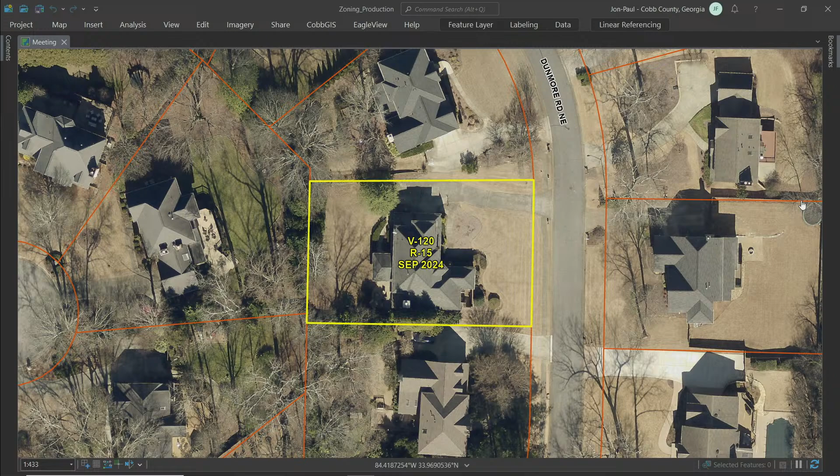I know there was some concern from the Stormwater Department about what happens when that fills up. But the homeowners have lived in the house and the neighborhood for a very long time, and would like to continue to live there and have the outdoor space. I know it was suggested that we do something on the downhill neighbor's side to help prevent any flooding of their basement, but we're not comfortable with the liability of taking on that project, especially given the history of flooding in their basement.

Do you have anything else? No, that was it. Okay, you may be seated.

Hi, one of the things too that I guess we were— introduce yourself, do you need my name? Chandra Brown. Sorry, it was about the storm drainage size. We're going above and beyond in the sense that the extra percentage we're asking for, we're increasing the size of the storm drainage to incorporate the whole backyard, not just the overage. So we feel we're going above and beyond to help with any potential issues. Okay, thank you.

Mr. Heath, if I could have you come forward, please. Andrew Heath, Cobb County Stormwater Management.

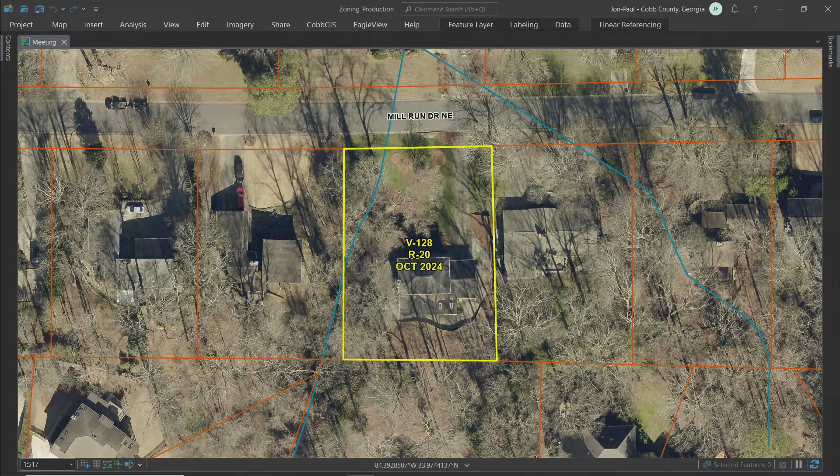And your client's not willing to budge? No, it's between $3,000 and $10,000 from what we've found out so far. If it was $200 or $300, $500, he'd be willing to, but that's a little out of his budget for the project. Okay, do you have anything else to add? No, ma'am.

Okay, you may take a seat. All right, Mr. Heath? Hello, Cobb. Andrew Heath, Cobb Stormwater Management. You heard the applicant has basically refused to do the analysis, so I don't know where that puts us. Yeah, I believe the variance request was for a rear building setback, if I recall.

So ironically, I don't really have any objection necessarily to a setback variance, but as a general rule — and it's seemingly unfair that one individual has to evaluate that issue — a long time ago, in the 70s, 80s and prior, there wasn't as much attention paid to stormwater management issues, and unfortunately there are a lot of built-in, difficult to resolve issues. I had spoken to the applicant by email a few times, and the applicant made the point that if the deck was going to be in the dam breach zone, potentially maybe the house is as well, and that may well be the case.

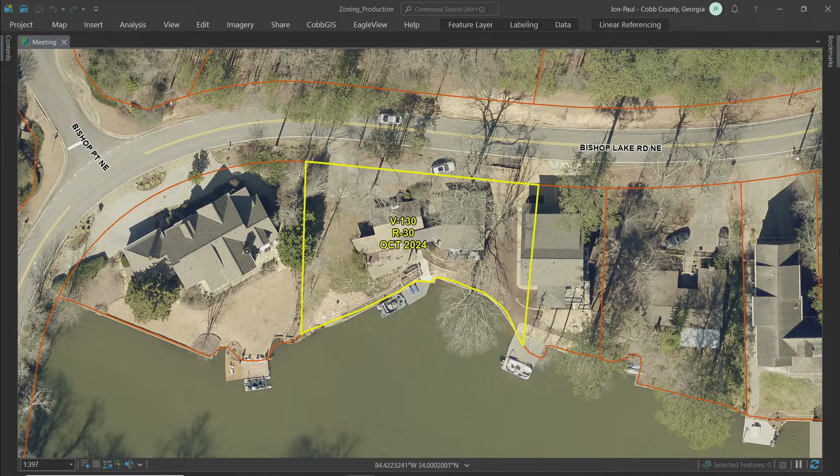Madam Chair and Board, I'm Robert Kane. My associate is Thomas Bogan, and we are representing the owners in the design of a new home for 4540 Bishop Lake. The owner's property is a legally platted residential lot of record. The owners have a vested right to build a residence on this property, and that right has been impinged upon by subsequent adoption of R30 zoning. The application of R30 zoning, designed for lots minimally 3 times the size of our client's lot, has on this property rendered 95% of the property unbuildable.

By definition, a zoning hardship is a unique condition of a property that makes it difficult or impossible to comply with zoning regulations. Given the jurisdictional hardship imposed by the application of R30 zoning on a legally platted residential lot, the owners request the following variances, which are sufficient to allow them to construct a home typical of others around the lake. The variances we are requesting are a 19-foot front yard setback...

Excuse me, do you have handouts for us that has all this listed? Sorry, what? Do you have handouts for us that has your variances listed so that we can have them? We have a slide presentation that will help. We really need it here on our desks to see it. Well, we'll show you what we have.

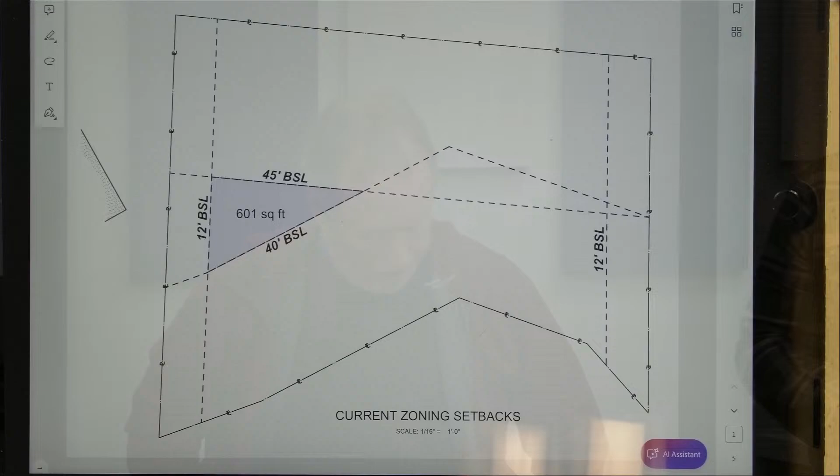We're requesting a front yard setback of 19 feet, aligning with the street side of the existing house. We're requesting a rear yard setback aligning with the lake side of the existing house. We're deleting our request for a side yard setback and for the driveway request. For similar reasons, many variances of this nature have been granted by Cobb County on numerous properties around Bishop Lake. Properties on either side of this property and directly across the slough are prime examples. My associate, Thomas, will now present documentation of the effect of the zoning hardships on this property, also adjacent and nearby Bishop Lake properties with similar conditions that have received variances. And finally, we will present our solutions for a new house on the property if the variances are granted.

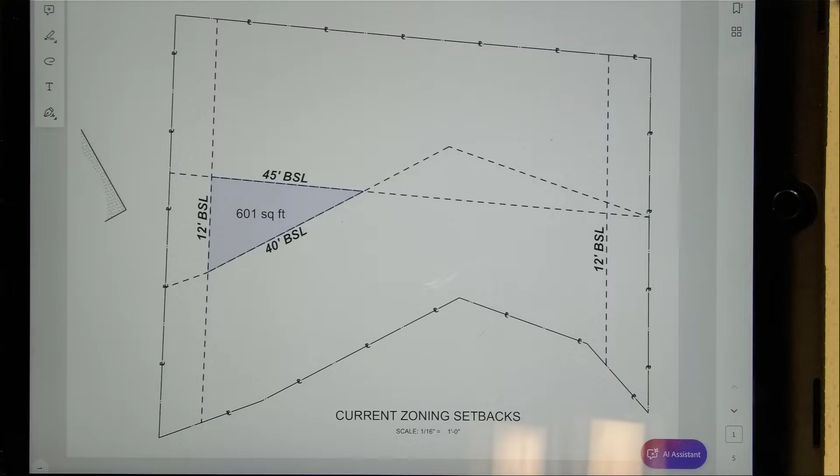Once again, I'm Thomas Bogan. I know the site plan that you have on record still from last time we were here was, I guess, somewhat confusing. So we decided to present some diagrams where we split out that information to make it clearer. This first slide shows the property with the current zoning, the setbacks - front, side, and rear - and the resulting 601 square feet that's currently buildable if this was just a new lot with nothing on it. This shows that same buildable area with what's existing currently shown. This shows what that equates to in program: a very small single-floor house and an adjacent small studio.

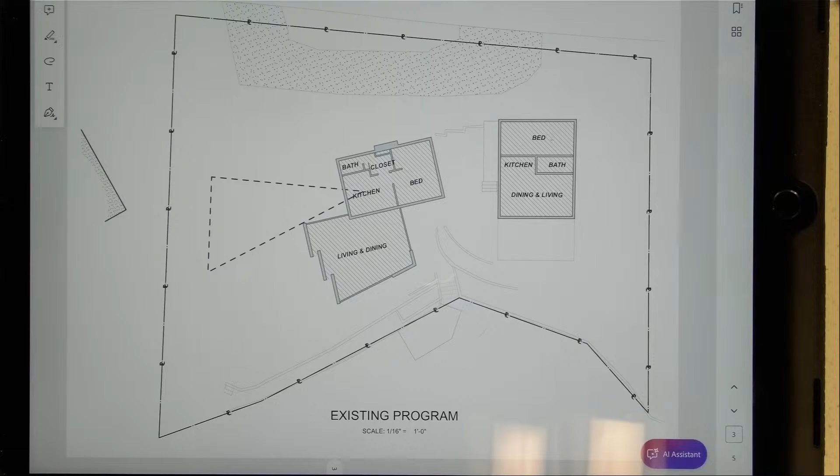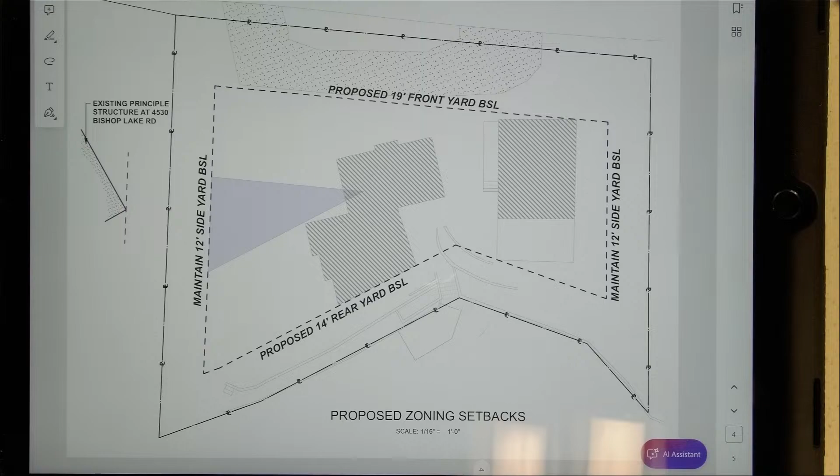These are our proposed front and rear setback reductions based on the existing structures. We're maintaining the side yards with no request there, and we are not requesting any increase to the allowable impervious surface. This shows overlaid a rough idea of the eventual massing of the house with a garage, just a slightly larger footprint than what's there currently, to basically meet contemporary standards of what would be expected in a house of comparable size in the area. The existing total building footprint is 1,683 square feet. The resultant total footprint would be 2,918. Anything dealing with impervious surface would be dealt with during permitting - we aren't asking for any increase allowable. Anything dealing with stormwater, we intend to abide by all codes, all regulations, all ordinances.

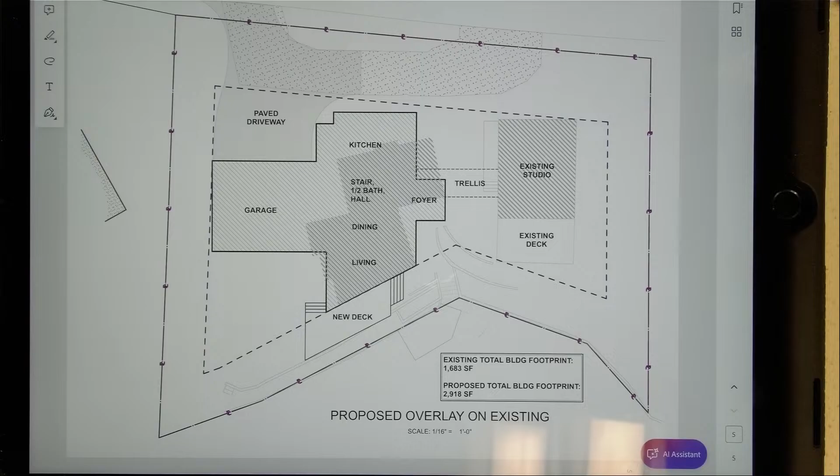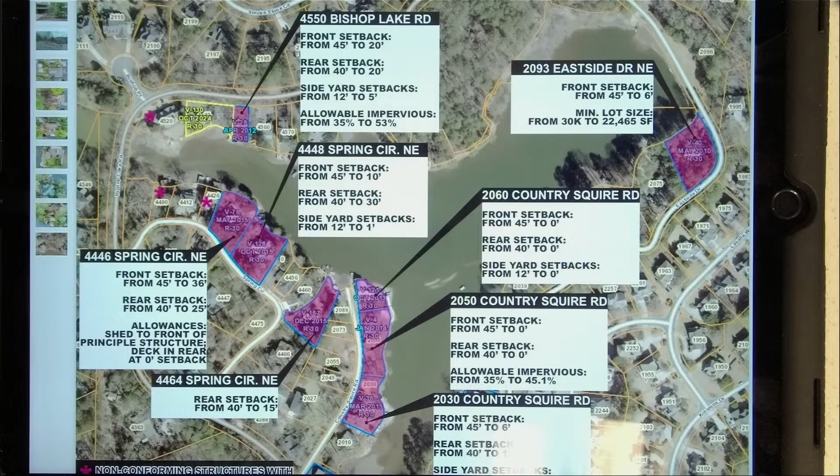This is the map that's currently available online, showing variances in the immediate area that have been approved. Many of these reduce the front yard and rear yard setback to 0 on lots that are less constrained than 4540 Bishop Lake. Many have been reduced to 20, or 15, or 6.

There are also properties marked with an asterisk for which there are no variances recorded, but the structures on that lot are clearly non-conforming and would have required a variance to make what's built there even legal.

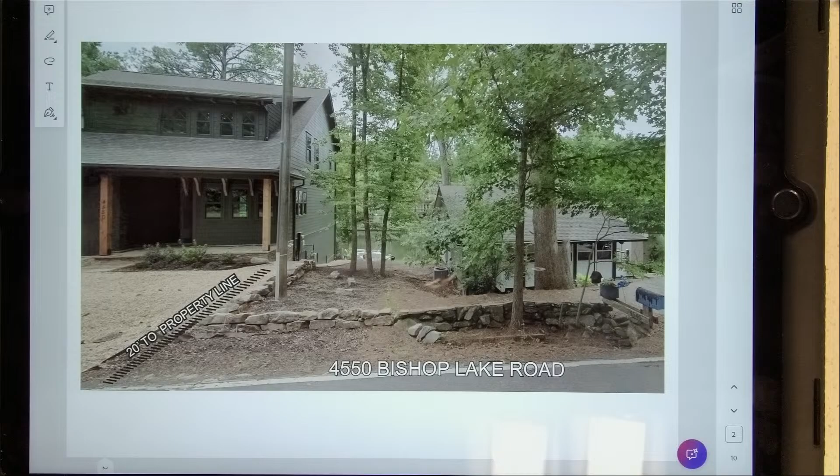We have some aerial photographs. This is the property 4550 Bishop Lake, just to the east, which was granted a 20-foot front yard reduction.

And we could go on. There are numerous properties around this lake where the houses are built right up to the lake, where hardscape is right up against the lake, and there were, I guess, no concerns raised about the non-existent lake buffer, stormwater, or erosion control when these were built.

We're just asking to reduce the front yard and rear yard setback to allow for a house of comparable size to those around it to be built here. There's a clear precedent set all over this lake where people have been granted much more extreme setback reductions. Thank you.

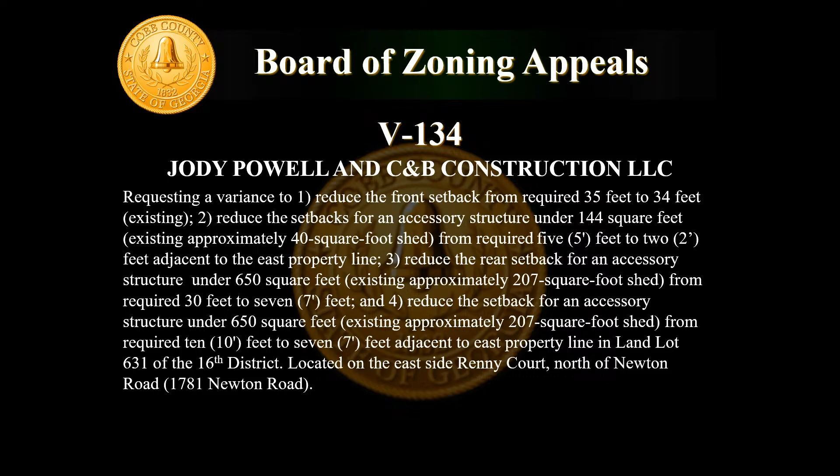Number three, reduce the rear setback for an accessory structure under 650 square feet for an existing approximately 207 square foot shed from required 30 feet to 7 feet. And four, reduce the setback for an accessory structure under 650 square feet for the same existing approximately 207 square foot shed from required 10 feet to 7 feet adjacent to the east property line, in land lot 631 of the 16th district. The property is located on the east side of Renny Court, north of Newton Road.

Is the applicant present? The director shows the applicant is here. Is there anyone here opposed to variance case V-134? The director shows no one opposed. Would the applicant please come forward to be sworn in?

Hi there, my name is Jody Powell. So to begin with, I'm very unprepared for this, I guess. November 25th of 2023, our house burnt down, and we are just trying to get a variance because after doing boundaries in the site plan, we found that the southwest corner of our house is right on the current setback.

We're also asking for a variance to provide a wheelchair ramp for my wife, which will go past the front setbacks currently in place. I also have a shed where I keep my lawnmower and tools, and a small wood shed on the east side of the property. Instead of tearing all these things down, we're building back on the same foundation. So this is the reason why we're asking for the variance.

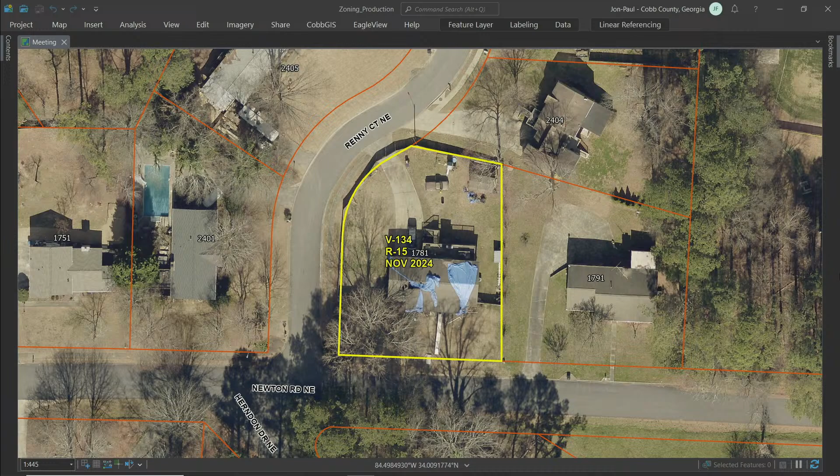Okay, so any questions from the board? Okay. My motion would... oh, you may sit down. Oh, thank you, thank you.

My motion would be to approve the variance, incorporating the fire department's requirement for 1-hour fire resistance construction because the setback is less than 5 feet, and also to move the sheds as needed outside the drainage easement. I think that takes care of everything. Any questions or comments? Do we have a second? Second. Place your votes. The variance is carried 5-0.

It's approved. Next, Mr. Peterson.

Okay, next case is variance case V138, West Buchanan. Request a variance to, number 1, allow an accessory structure over 1,000 square feet for a proposed 1,800 square foot sports court to be located closer to the side street than the principal building. And number 2, reduce the setbacks for an accessory structure over 1,000 square feet for the proposed 1,800 square foot sports court, required 100 feet to 7 feet adjacent to the north property line, 14 feet adjacent to the west property line, and 91 feet adjacent to the south property line in land lot 255 of the 20th District. The property is located on the west side of Cherry Bark Trace, south of Walker Hill Way.

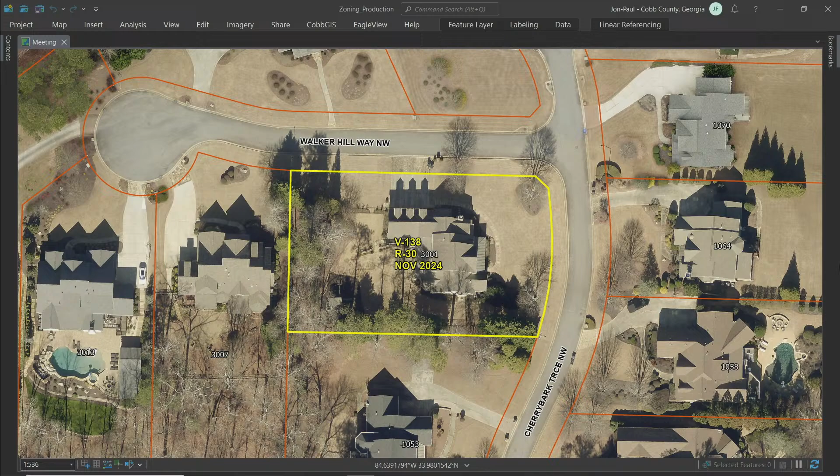We are going to be over 5,000 square feet of new impervious surface. Our approved plans for the pool already show a stormwater management system that would hopefully be acceptable to Mr. Heath over here. We went ahead and sized it in anticipation that the board would hopefully agree for the sports court, so that impervious area would be included as well. So that's really it.

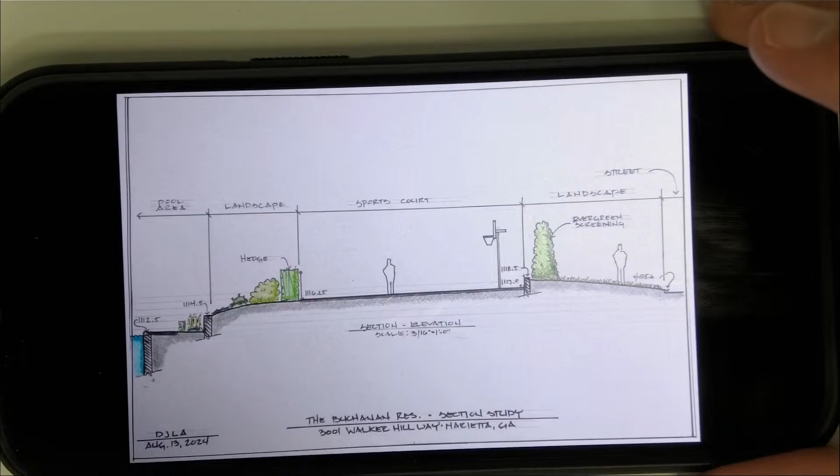So if you're looking at this plan, to the right would be Walker Hill Way, and then there would be, I think we were talking like 8 foot high evergreens in front of the wall, but you can see where the wall would be, a cut wall in that scenario, and then the basketball goal.

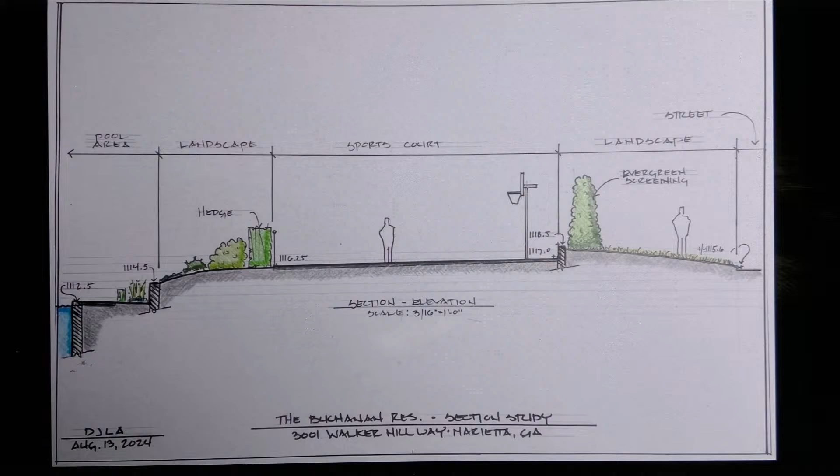You have curb there on the road, on this area? Okay, so how far is the curb from where these evergreens are proposed to start? With the 7 foot, we would be putting it right up close to the right of way, so it's a 50 foot right of way. There'd probably be your driveway apron, probably another... yeah. So it'd probably be from the back of the wall to the curb, like we say, 17, 18 feet.

Why was this wall designed to be curved rather than a straight wall at that point? It's pretty much for aesthetics.

You say you've already built the sport court or in the process of doing so? Not the sports court at all, no. That would be something that we would need the variance for. So we've started construction in the backyard for the pool and that leveled out area in the back.

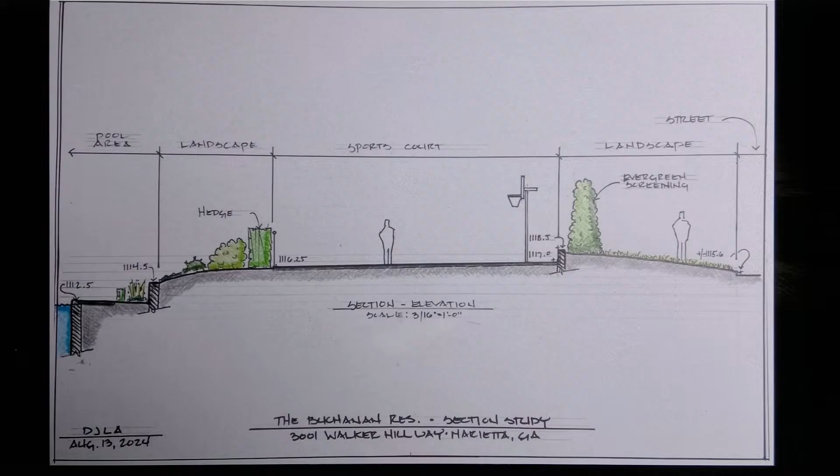Do you plan to use any lighting on the sport court? Just low voltage lighting, landscape lighting, and there's a security light on the back gable of the home. So there would be no commercial stadium type lighting or anything of that sort. Any overhead lighting above the rim? Any elevated lighting above the height of the rim? Oh, no, not at all.

Could you also give us your name, please? Wes Buchanan.

So I'll throw this out to my fellow board members. My leaning at this point, and I want to solicit your comments, is to require that they go back and come up with something that's at least 10 feet outside the right of way as to all matters being constructed, and that the evergreen screening stay at least 5 feet from the right of way. That would be the direction I would try to provide to this applicant and his design professional. And then I would probably put some restrictions on the lighting, but I throw that open for comment before making a motion.

The neighbors that are mostly affected behind this, have you reached out to them? Do they know what you're building? Did they sign? Did they approve this? Yeah, they're very aware. You have a signature from them? I have it, yeah. And you have a signature from the neighbors to the side of it as well? Yes, both neighbors. And they know that you're having a sports court? Yes. I had to get it all approved through the HOA. Oh, you did? Okay, yes. And their signatures are part of our application, it should be in our packet. Yeah, I didn't get that part, but thank you so much.

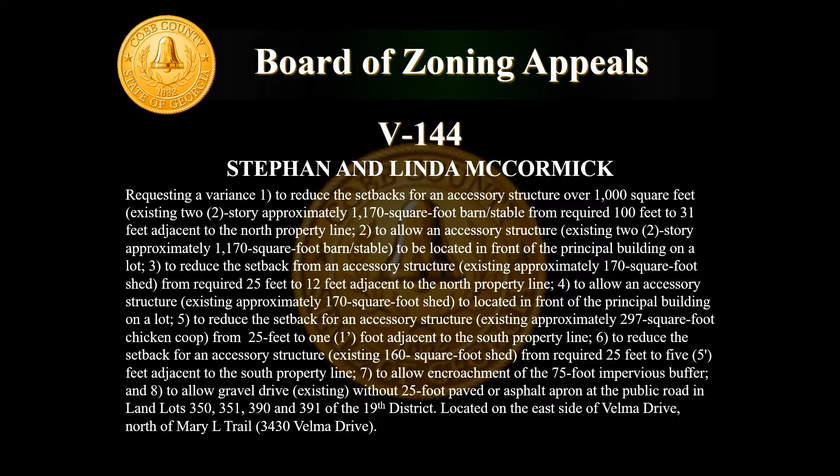Number 7, to allow encroachment of the 75-foot impervious buffer. And number 8, allow a gravel drive, which is existing, without a 25-foot paved or asphalt apron at a public road, in land lot 350, 351, 390, and 391 of the 19th District.

The property is located on the east side of Velma Drive, north of Mary L Trail. The applicants are present. Is there anyone here opposed to variance case V144? Let the record show there's no one opposed. Would the applicant please come forward to be sworn in?

Okay, I'll try not to be too nervous. My name's Linda McCormick. I'm Steve McCormick.

One correction, the barn is not 2 stories. It's a lean roof, and it's just 2 stalls. If you're familiar with horse barns, we have no loft. There's nowhere to put hay, so I just want to make that correction.

Take your time. Okay, I'm sorry, it was just number 8. I'm sorry, I have a hearing loss. I was really asking for your input on number 8, why you don't want to asphalt. Okay, the gravel driveway? We've been trying to get all this together, and we should have done it beforehand.

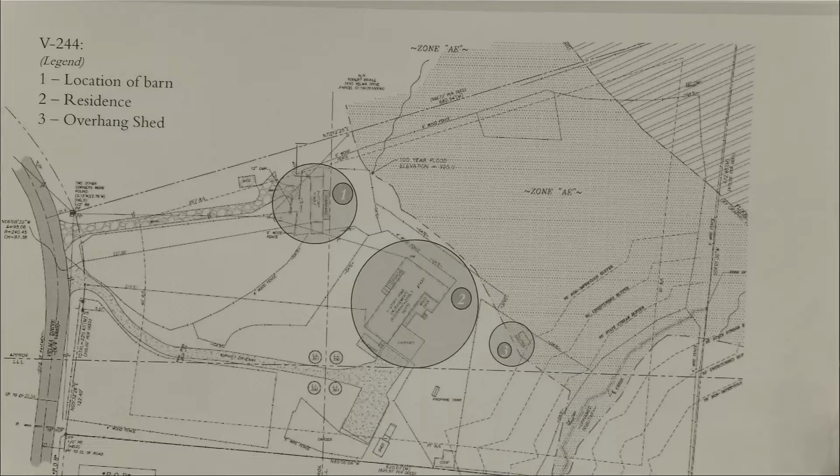What we do have, it's not really like a driveway. It's a little road to the barn from the street, which used to be grass and pasture. So if this committee would approve us with all our other variances, if we need to, we can fence that off. We have horse fencing on both sides. We could close that off.

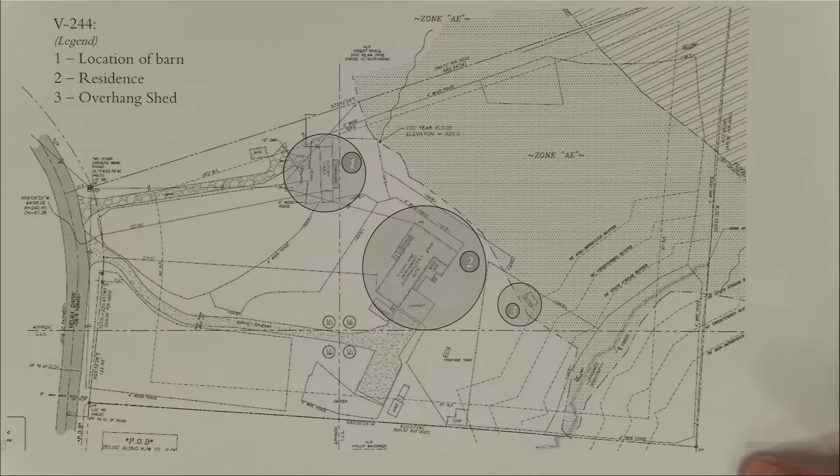We looked, since it was mentioned to us about the cost of doing the 25-foot, and we just do not have those funds right now. My 91-year-old mother, who is disabled, lives with us, so my husband works from home. He takes care of her. I work in a medical office.

I guess what I want to let you know is we are sorry that that was not worked on beforehand. We did not know, and I know ignorance is no excuse. If you see here at the very tail end of where the barn is, I'm sorry.

I can't hear you, hon. Right there, where it goes in, we have horse fencing, 3-board, very nice horse fencing on both sides that kind of frame in that area to go down there. The only people using it now are, if we get hay, we put hay in our little hay shed there, or myself.

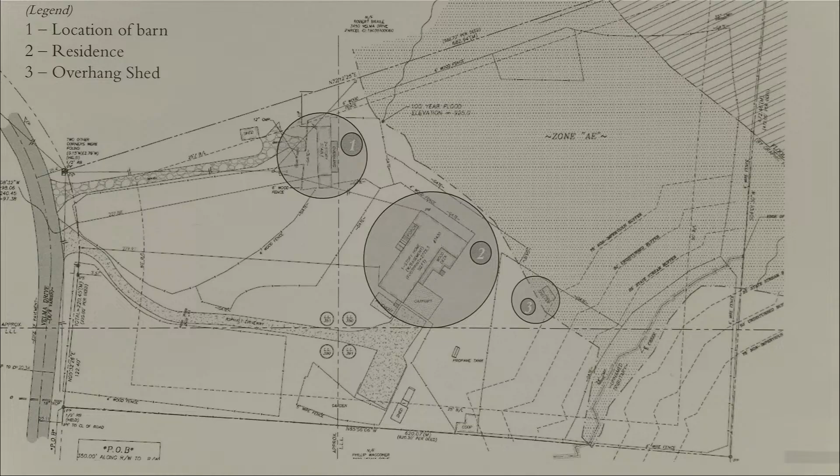I'd like to mention too, the road's been in existence for about 2 years, and it was built very well. It was packed and it's level with the street. It's an easy entrance into that. We've had county vehicles, heavy vehicles, a little bit of traffic in there. So in terms of the integrity of the road and its structure, we believe it's very good.

We know that the ordinance exists. However, we'd like to beseech the board today, if in any way possible, to have this variance accepted. Or also—

Foolish on our part, there's also another small horse farm. These are large lots in this neighborhood, and there are a lot of little horse farms on it, and other people have gravel driveways. I even checked that after we were told about this, and I was like, oh, I didn't realize that.

I'm sure everybody's familiar with the expression about assuming. Yeah. So what I'd like to ask, please forgive me for putting these back on, I have cataracts, so I need surgery desperately.

But what can we do today to beseech you guys and ask you to approve our ordinances? What do we need to do with that gravel drive if that's the only thing keeping us? If that's the only thing keeping us, and we can't afford at this point to do 25 feet of paved road—